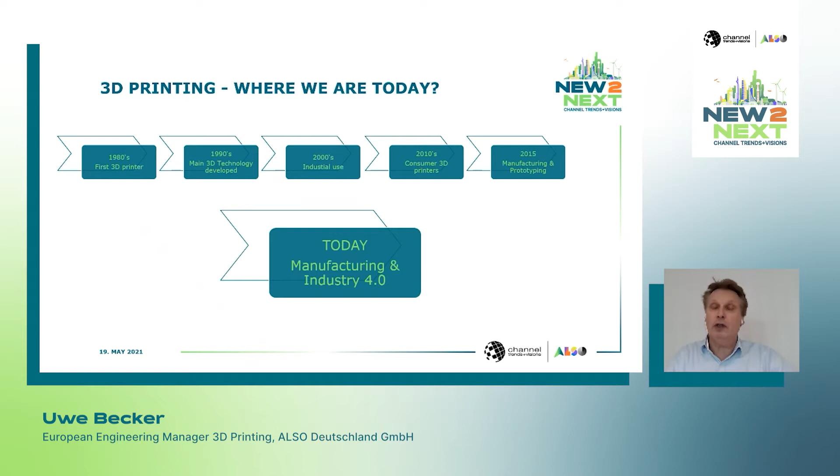So where we are currently, I think it's a clear trend and a clear time for manufacturing with 3D printing, and industrial general use of 3D printing. Does that mean 3D printing fits for all and replaces all the other technologies? No, of course not. But it is an interesting and flexible, good technology that helps some customers to achieve their goals.

I have chosen one example of the automotive production cycle. What is important for automotive production is, of course, it has to be automated, based on the quantities we want to produce. It has to be productive, the process has to be stable, and the quality is important.

3D printing today, under these particular aspects, doesn't fulfill all these elements, not alone. We need some other elements around 3D printing to achieve that. But 3D printing has very high design freedom, because you can design for 3D printing any tool or any part you want, independent of the complexity. This technology can print it.

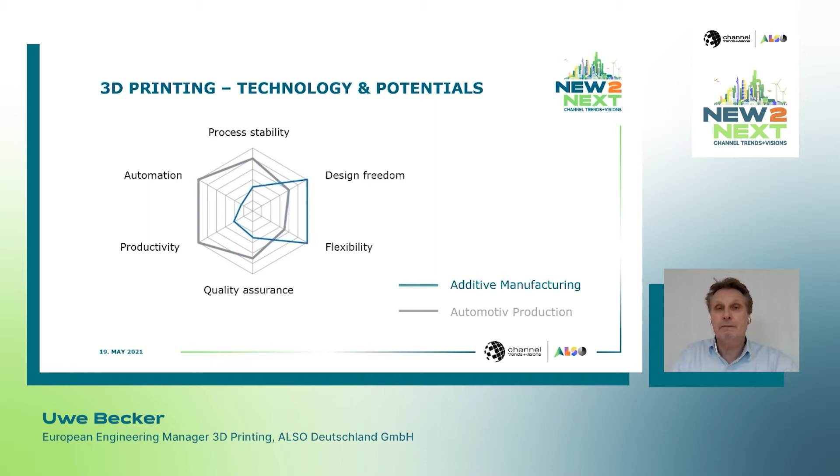And it is very flexible, because you can just start with your 3D object and produce something. Another aspect that is important to 3D printing is that it can also change our production world, or the manufacturing world. So instead of producing in one central point, it is maybe better to produce parts decentralized, where you need the parts, instead of having that one place to produce things and then having all these transportation links to the areas where the final product is needed.

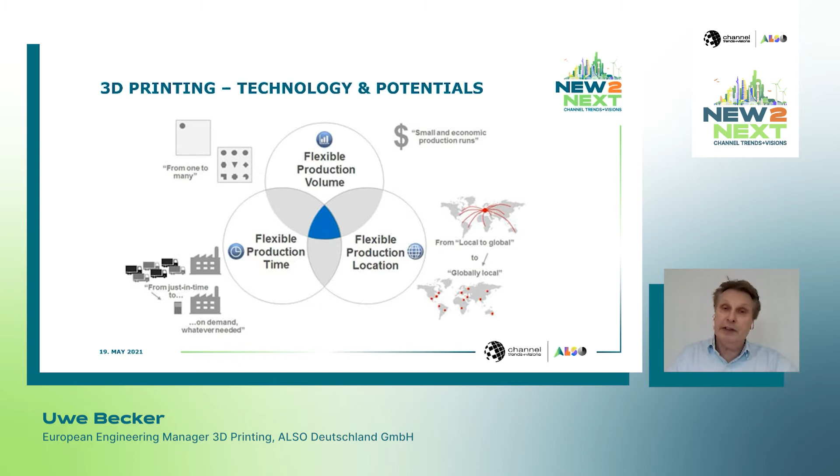So, you are very flexible - with 3D printing you can print on demand. Instead of producing something for your stock or your warehouse, it is maybe better just to produce something if it is needed. These are important factors that make 3D printing attractive for industrial production and mass production. But there is also one downside, because 3D printing for mass production is not very cost effective. One printed piece costs the same as 10, as 100 per piece - it's a little bit different, of course, by the mass, but it has no big variations here.

Versus injection molding, one of the traditional manufacturing processes, you have high tool costs when you start with one piece, but if you then inject hundreds, thousands, or millions of pieces, the single price per piece is very low. So how can we balance that? How can we bridge that gap? We have to bring that cost line down, and I'd like to show you in the next slides a few possible factors for doing that.

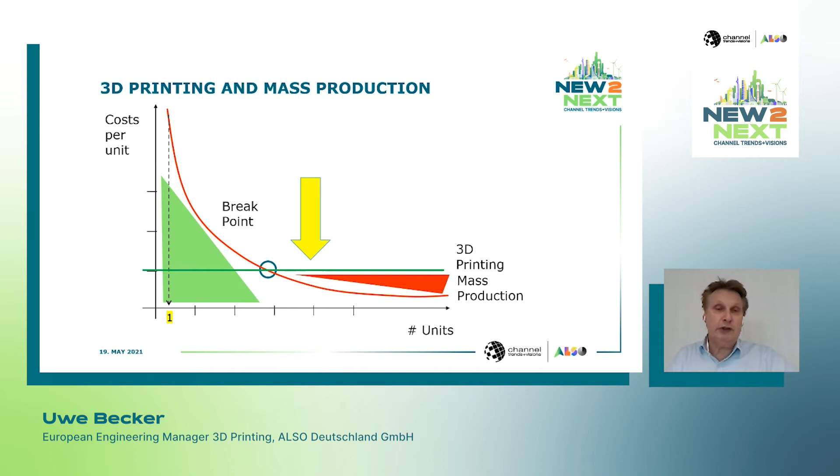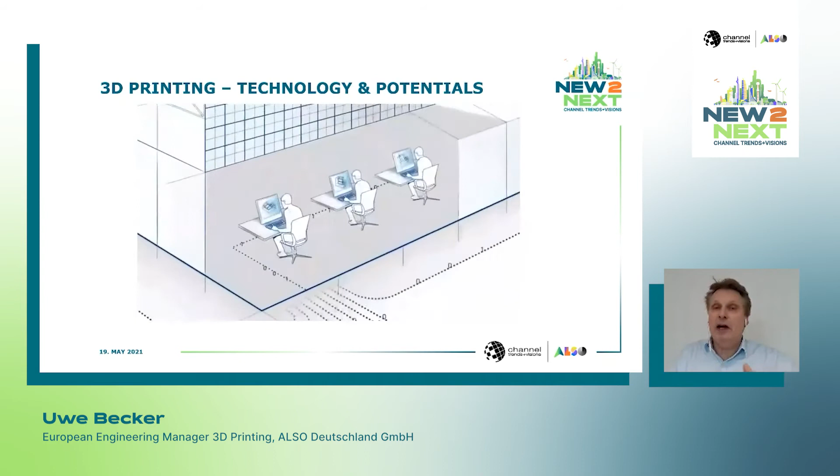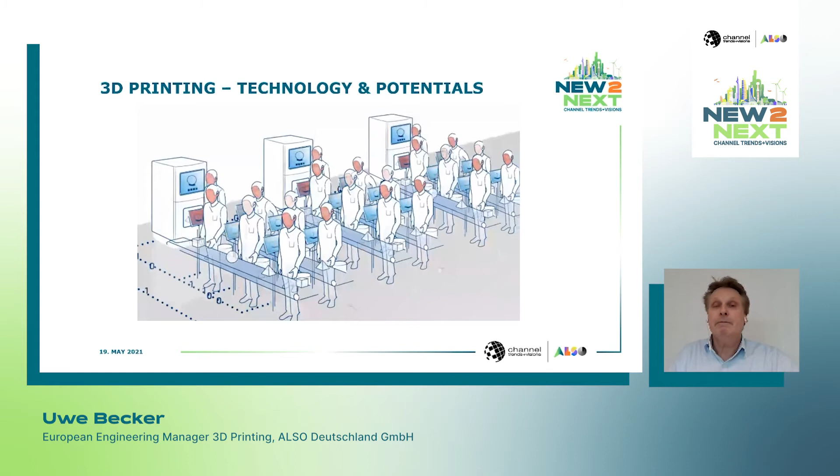And you think about a 3D print center, where all the data flow in, and then you start printing. To scale your print with more and more printers, you also need more and more capacity, human capacity. Not only the labor costs here, but there are a lot of steps in between which have to be done manually today.

So 3D printing is not an isolated thing. 3D printing is part of a process workflow. It starts with the design, and how you design and how many designs you do is an important factor. Then you have to prepare your designs for 3D printing, depending on the printing technology. Then the print is finalized. You need the post-process: clean it, depowder it, color it, finish it. And finally, automated processes like packaging and sorting come into play. You need all that combined to get a 3D printed process workflow.

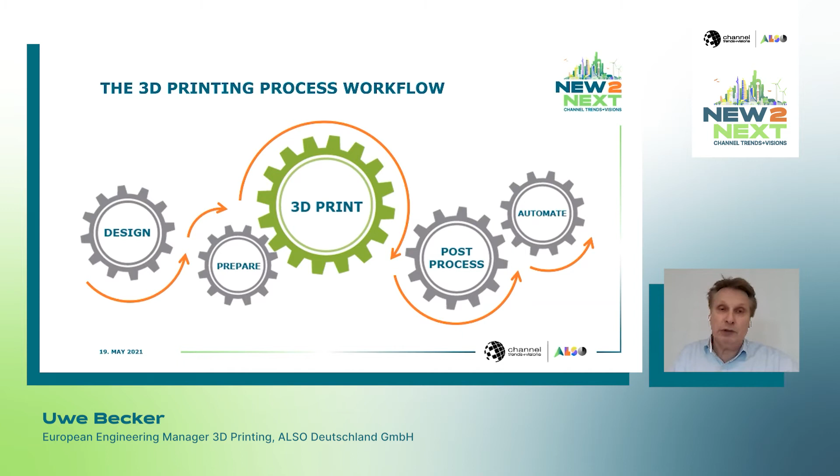I want to go through each of these elements today and show you how we can improve on what we have done already and what is available. Let's start with the design.

Normally, as an engineer, you would design a part on your laptop or PC with your CAD system, then maybe print it out as a prototype and check if it is functional, if it works in cooperation and assembly with other parts. But generative design does something different.

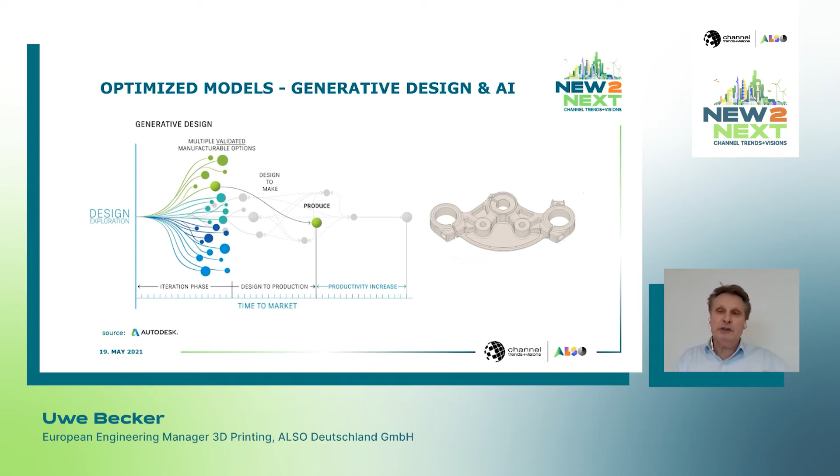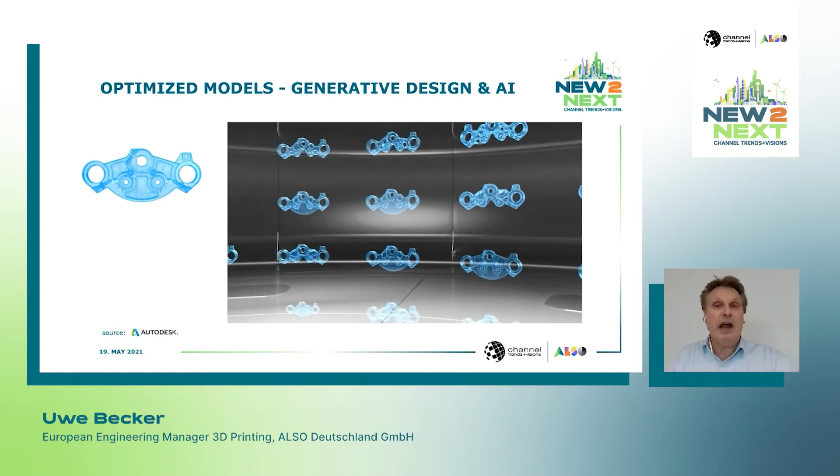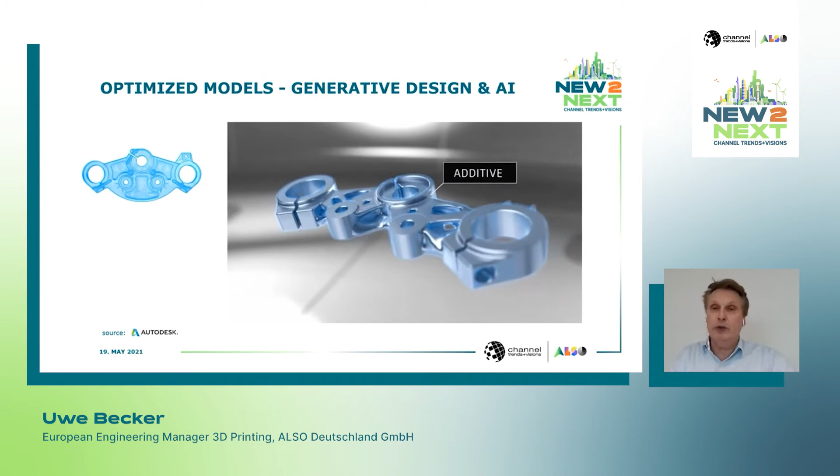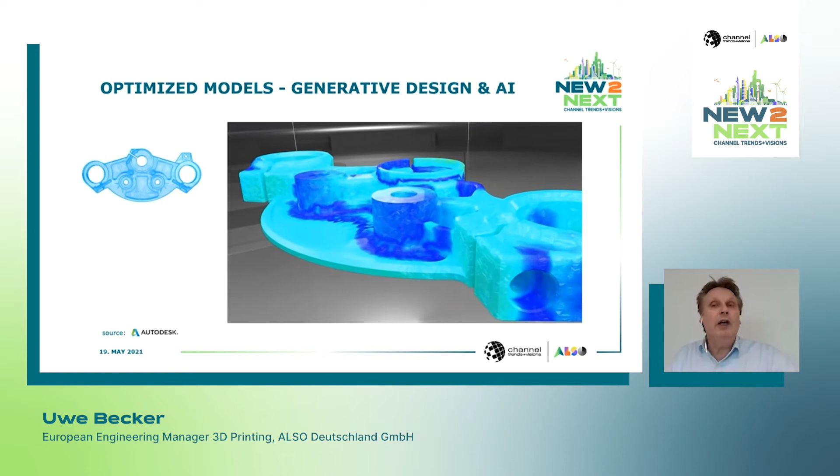Generative design picks a few of your factors, picks your basic design, and does a lot of iterations. It can create on your behalf hundreds, thousands of variations with small differences. As the end user, as the engineer, you can choose the right one that fits the technical needs and parameters, the right one that fits your production process like additive manufacturing, or the one that best achieves the strains or physical parameters you want. The software can then simulate that, and you can finally print it.

This shortens your time to market and your development process enormously. And to be honest, these generative design tools are so intelligent in the meantime that they can create things you wouldn't even have thought about. So this is a great opportunity, a great tool to increase productivity in 3D printing.

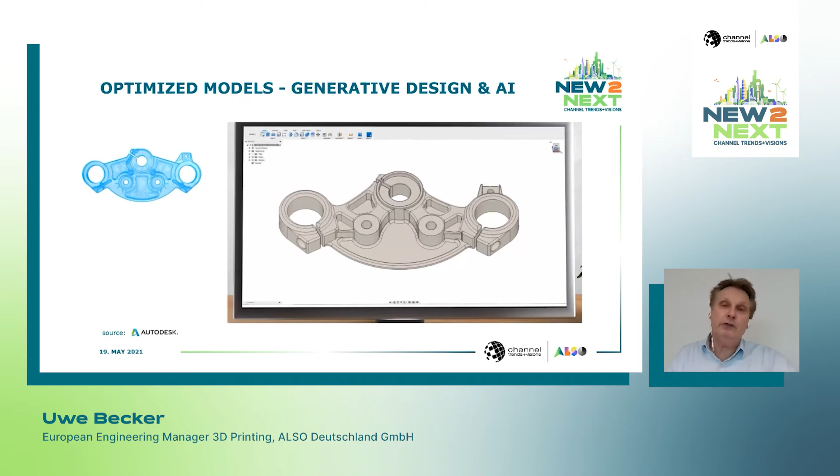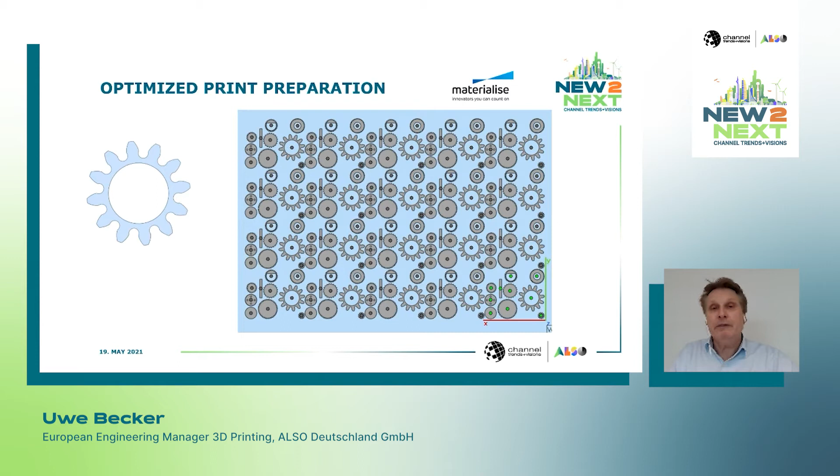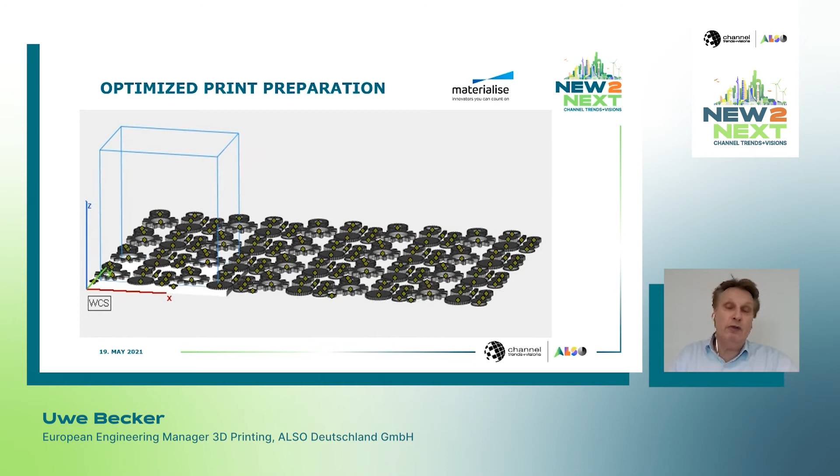So if you have developed that, for example a gear or a set of gears, a few hundred, you want to print them with a powder and plastic printer. Therefore the challenge is to bring all these 200 pieces in this example into that box that represents the build space you have in your printer. You can do that manually, of course, or you can use intelligent software products like from Materialise who do the job for you based on your rules, your parameters, your criteria.

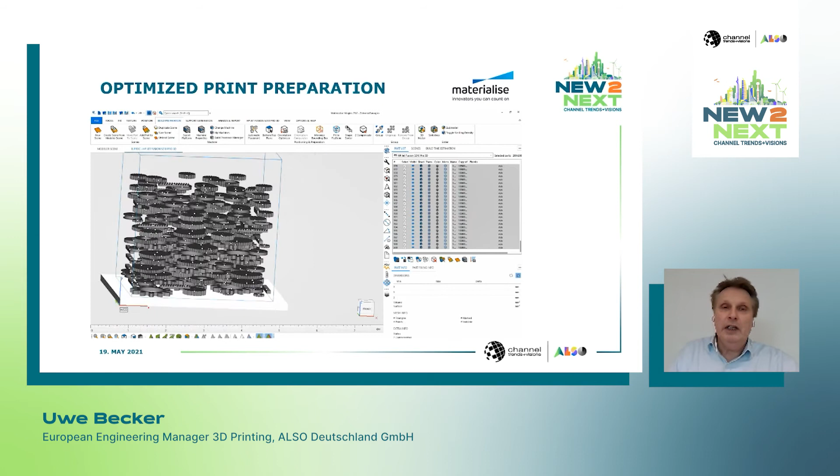And in this example, and this is not a time lapse, it is live, this organization of 200 pieces takes maybe 2 seconds. Done. And again, this is live, this is real time. You can set other parameters around, have them closer or more distance or whatever you want. So the system works perfectly and helps you optimize your print space.

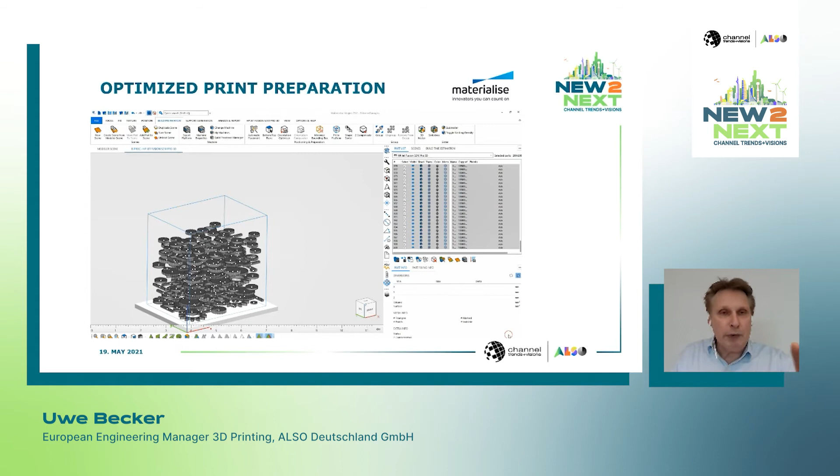And then it comes to printing itself, the kernel, the thing itself. But the printer, honestly, in most cases, is a closed black box. The process in the printer is controlled, and there's nothing you really can do to that process manually. You load the job like this one you just prepared, push the start button and let the printer do the job, and a day later you're done.

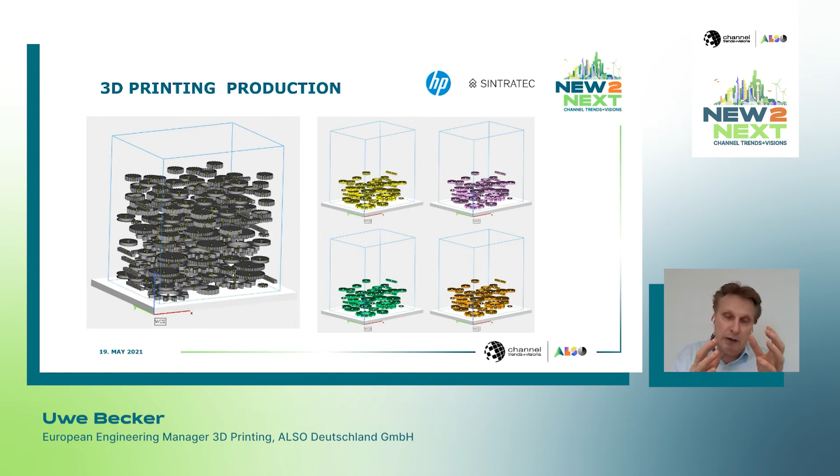But there are two strategies for how you can scale. You can have either a big printer where you print all the parts at once, or a small fabric of a number of smaller printers, which you can load with different materials, where you do the job whenever it's needed. Because for the big one, you need a threshold on parts to make that really efficient, working 24/7 operations. And if you don't have so many parts to print in the beginning, it could make sense to have a smaller system and scale system by system.

The material variation is also an important factor. If you have the need to change material very often, or want to use different materials in parallel, then a number of printers, independent, small or big, could make sense.

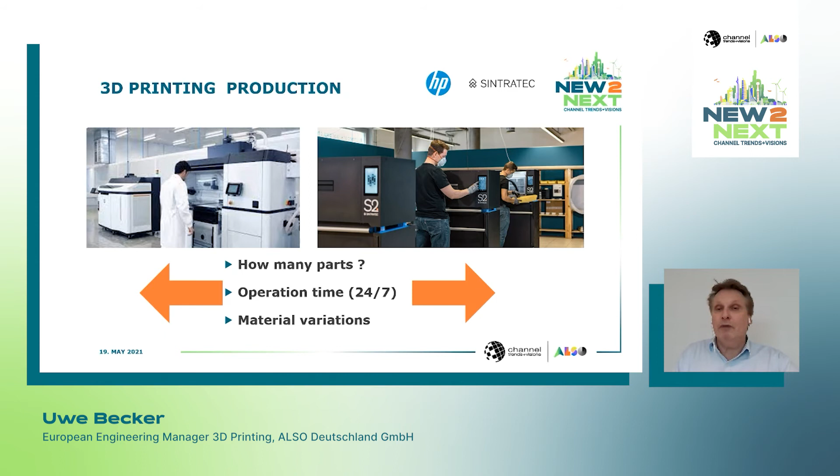And that, by the way, is also valid for traditional manufacturing processes. If you use milling or injection molding, there's also a post-process related to that - a different one, but a post-process.

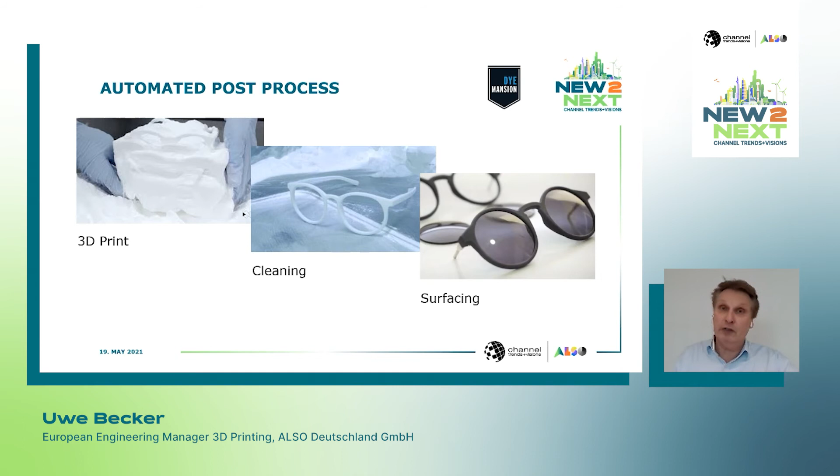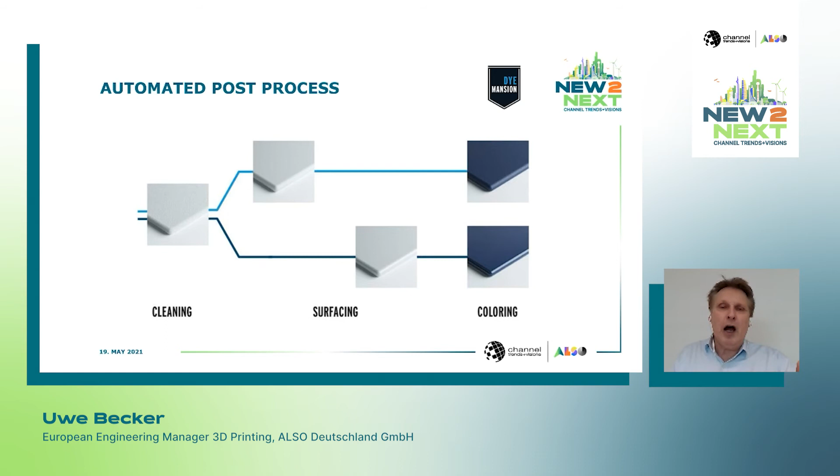DyeMansion, for example, as one of the brands in our portfolio, have perfect machines to do this cleaning job and do surfacing, smoothing or not smoothing, and do coloring. And important in coloring, if you have chosen a color, you want to make sure that next time when a customer orders the same part, you can achieve the same color, the same tone. You need experts and an automated and controlled process to do that.

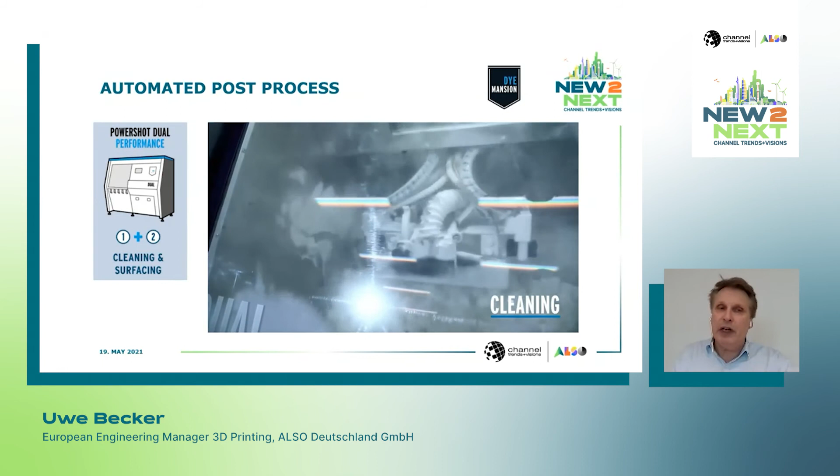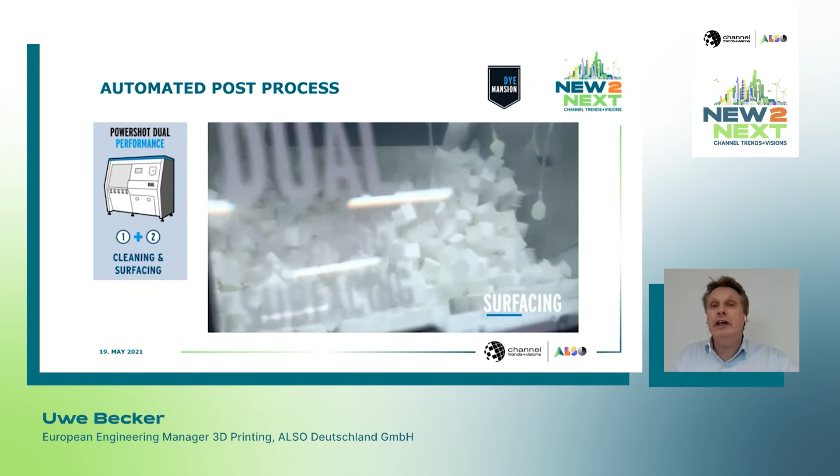DyeMansion just announced their next step in development, a combined dual performance machine that can do the cleaning and the surfacing in one machine. In addition, this machine is also able and capable to have an automated through or output of the parts, because that is important.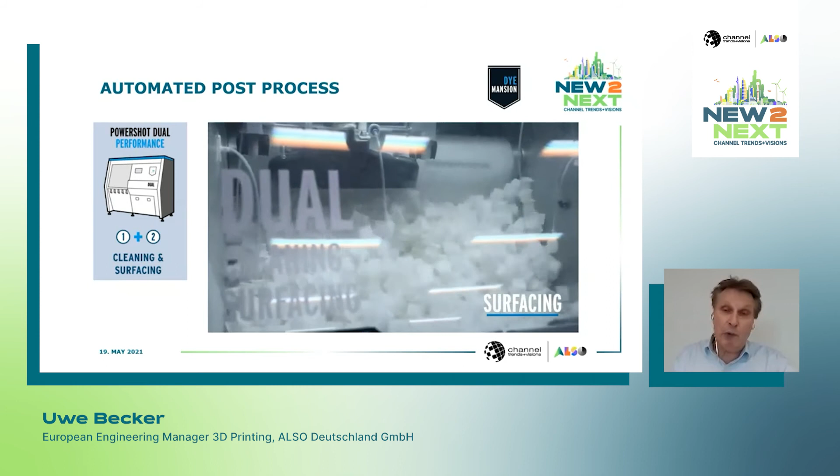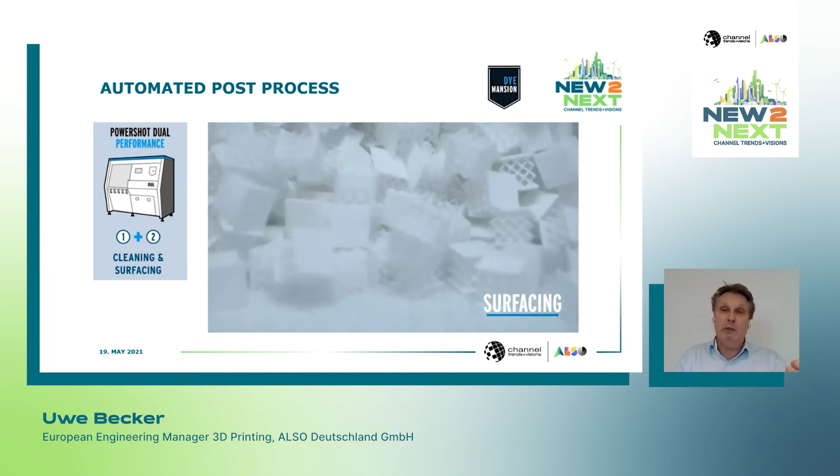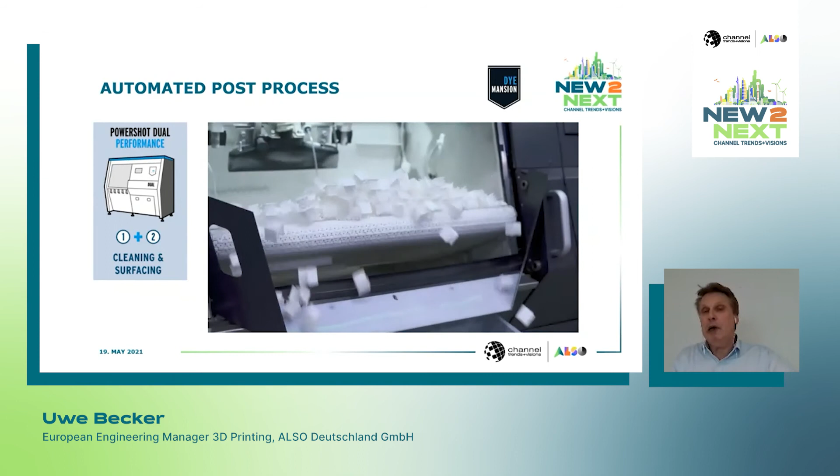What is the alternative? The alternative, where you may start with post-processing, is a sandblaster where you have the parts in your hand and do it one by one. But that is not very scalable. If you have hundreds and thousands of parts, if you have a number of printers and a production line, you need such systems to get that process piece automated.

And that is the keyword, automation. It is not only that you have the parts and smooth them and clean them. In that print job, you can maybe have parts from different customers to make the print itself efficient. And then you have to sort them. But how would you do that?

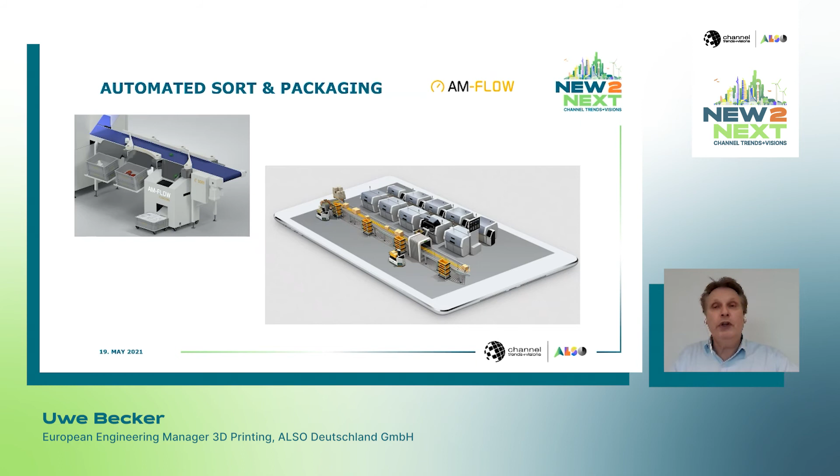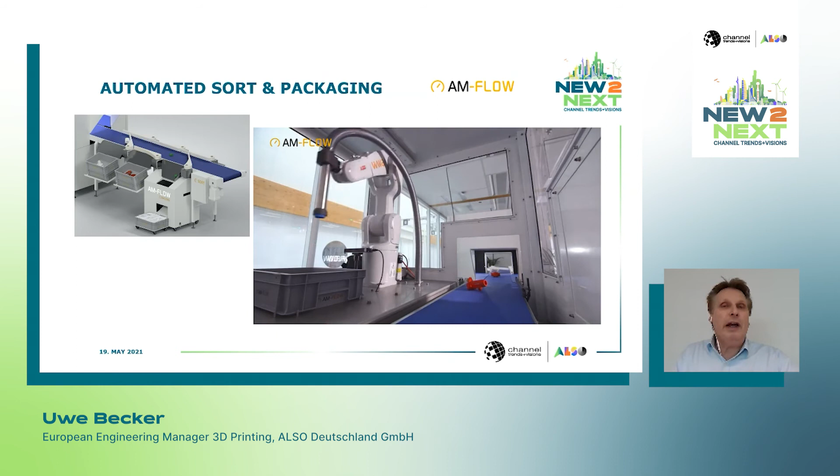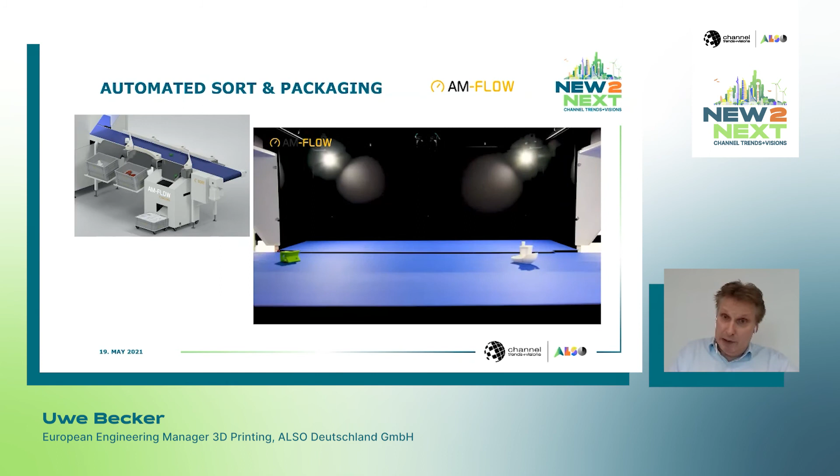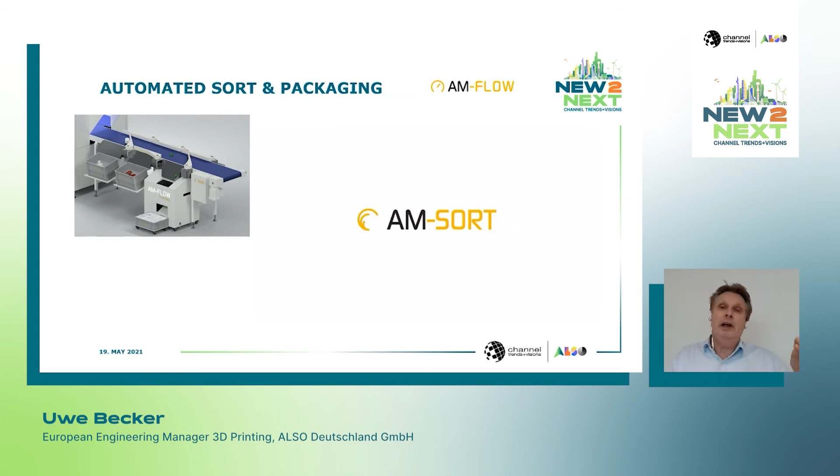Manually? With AM Flow, we are in cooperation, or we have contact to a good partner who can do all that for you as an integration to your workflow. AM Flow can sort the parts, check the parts, package the parts, and check your orders and fulfill your orders based on IT data and order data connected to this system.

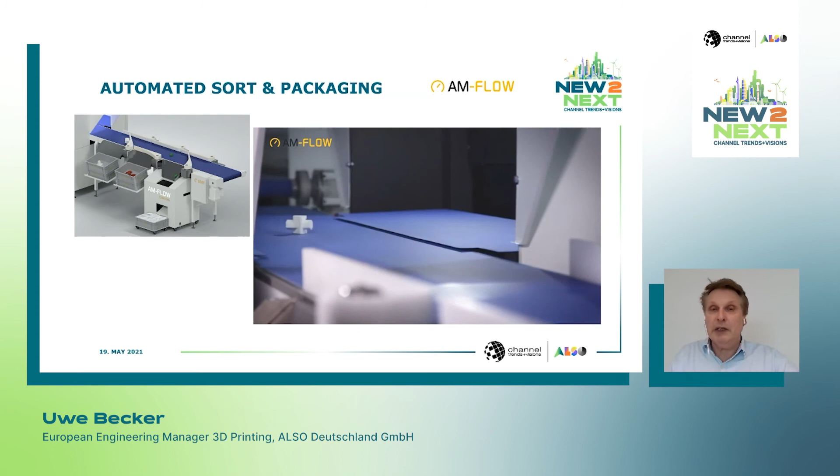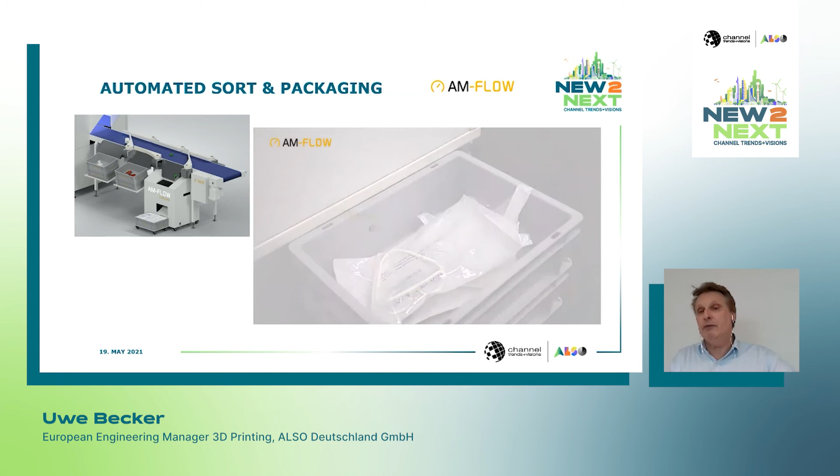So this is a very important piece, especially when it comes to mass production for 3D printing elements. Don't underestimate that. I know not all of our customers have this need today, but it's important that we have a solution for this step that's definitely coming in the next evolution.

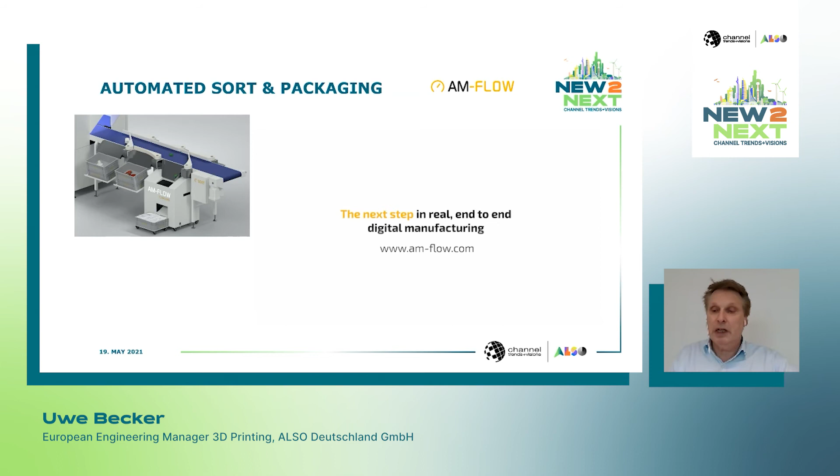So if you have all these steps done correctly, you get your 3D printing process and workflow with your automatic elements: generative design, the Materialise build processor which packs your build space automatically, the DyeMansion dual performance line which automatically does part of the post-processing, and finally AM Flow which can automatically sort, fulfill and package your orders. Then you have your full workflow with a minimum of human interruption or handwork in that.

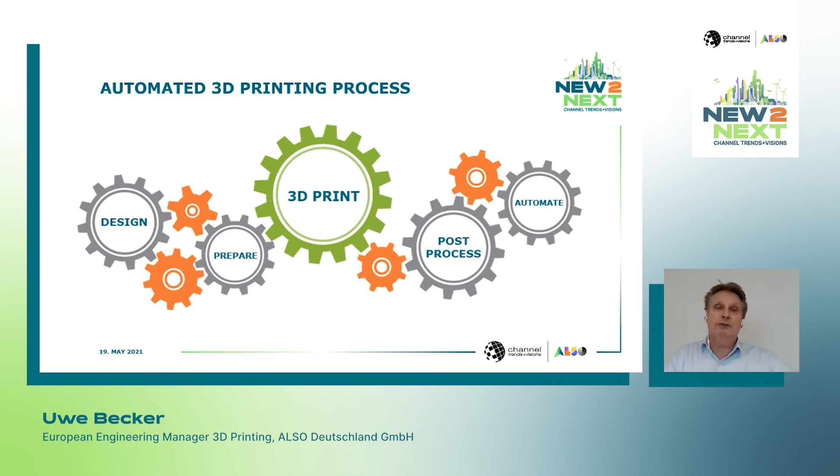But if you look a little deeper, 3D printing is only one puzzle piece, one element, one gear in this example of our solutions at ALSO. Because it's also not working isolated, just as 3D printing is not working isolated in its own process.

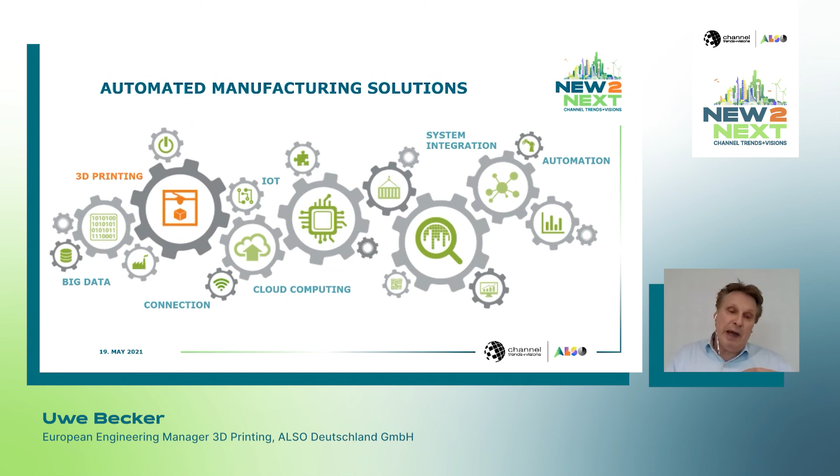If you have a closer look, you see things like big data, connections, Internet of Things, system integration, and of course automation. ALSO is the best partner to support this, because we have all these tools from our IT knowledge, our integration and services and solution knowledge, all these offerings ready for you, ready to sell. 3D printing is only an additional solution that can complete the manufacturing world.

The ALSO 3D Solutions Center started 4 years ago with distribution of HP Multi-Jet Fusion systems, but we're doing much more than that. We have built a full ecosystem around that. I have shown you a few things already from that.

We have services for this. We have, of course, the strong logistic and financial offerings here, so you can rent or lease the systems if you would like to.

And we have, as a solution center for 3D solutions, a good relationship to the 3D vendors. We are always looking for new solutions, we try to combine them, we test them, and we have a community of 3D partners with whom we do this business, supporting all regions across Europe with that centralized team.

So if you have questions and if you're interested in that, we are happy to support you and happy to assist you for your project.